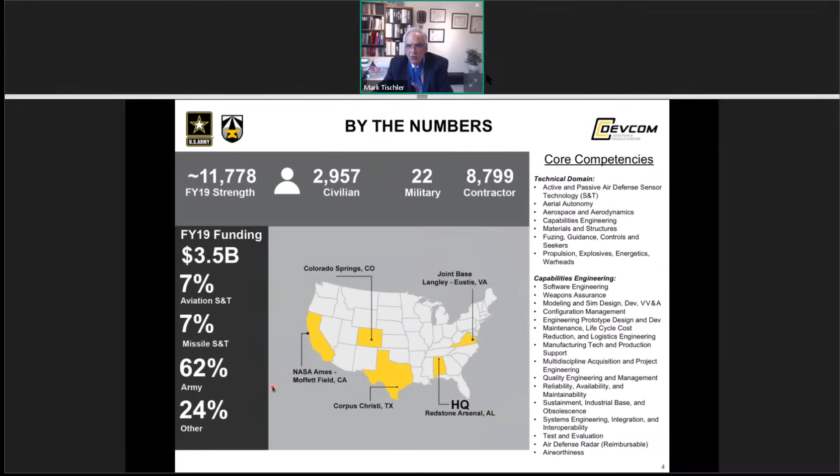The CCDC Aviation and Missile Center has a mission to deliver collaborative and innovative capabilities to the warfighter. We are headquartered in Huntsville, Alabama, and I'm located on the campus of NASA Ames Research Center. We have a total strength of about 12,000 employees. Our priorities are readiness, the future force, and soldiers and people, and you'll see that our research is closely tied to these priorities. It is traditional to start the lecture with addressing the personal connections to Professor Nikolsky.

And my personal connection is via Professor Pat Curtiss, who was a student of Professor Nikolsky's, and he gave the 20th Nikolsky lecture, as well as developing the Princeton Long Track. Professor Curtiss was a lifelong role model for me, a close mentor and research collaborator. He always stressed the importance of first principles, and as coined by my advisor at Stanford, Professor Art Bryson, a student of a student is a grand student, and that is my connection to Professor Nikolsky.

This is an agenda for my presentation this morning. I'm going to start out talking about flight control drivers and technologies. There are many flight control drivers. I've only listed what I think are probably the top four. First is that the vehicle is inherently very high order. You have the 6 degrees of freedom of the fuselage, but also the degrees of freedom of the rotor, the inflow, the engine, sling loads, and so forth.

This makes the system high order, and you need a high order linear model for flight control design and a high order nonlinear model for simulation. This requires engineers to have a strong multidisciplinary expertise. All hovering vehicles are unstable in hover and susceptible to turbulence, but this is especially true for multicopters. And finally, the bane of feedback control is time delays, and we're generating forces and moments via the rotor through about 100 milliseconds of time delay, which is dominated by the rotor flap,

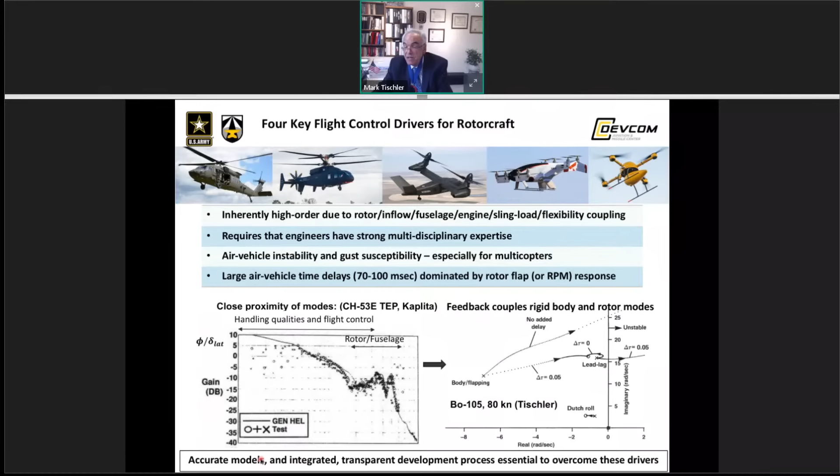And this kind of conundrum really limits flight control and dominates it, and was certainly the case for the Comanche, for example. So we need accurate, higher order, nonlinear and linear models integrated in a transparent development process to overcome these drivers. I'm going to focus on these four technical areas that have maintained a sustained focus in our team, and I'm going to hit the top advancements for the last 50 years. I'm going to list many folks,

but try to hit what I think are the top achievements. So the first is handling qualities development, and there's a great Nikolsky lecture by Professor Padfield in 2012 for reference. So the first major advancement was ADS-33 as a breakthrough for rotorcraft. It came on the heels of a fixed wing update of 8785, the fixed wing spec, which was moved into the frequency domain because of the high levels of augmentation and feedback. And that kind of characterization works much better in the frequency domain. And that was also done for ADS-33.

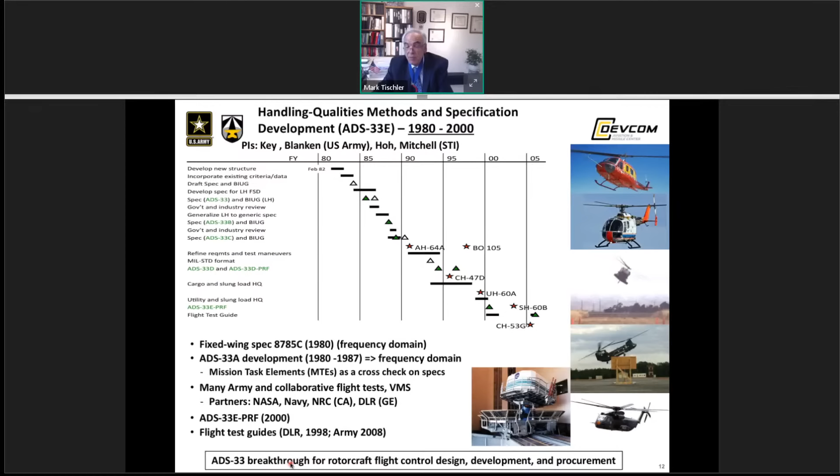Another key advancement in ADS-33 was incorporation of mission task elements, in which the pilot is asked to provide handling qualities ratings for specific maneuvers to cross-check the specs. We had many research partners internationally and nationally, and ADS-33 was released in 2000. There were flight test guides developed at the DLR as well as the Army, and ADS-33 has really been a breakthrough and provides guidance for flight control design, development, and procurement.

The first major breakthrough and concern was moving into the frequency domain, and there was concern about the applicability and practicality of this approach for rotorcraft. I had worked at Systems Technology, where frequency sweeps had been developed, and a lot of work on fixed wing. And I was the first to do frequency sweeps and system identification on a rotorcraft, that being the XV-15. This was followed by a major flight test campaign at the Army's flight test center to demonstrate these methods on the Bell 214ST.

And here you can see the rolling response to lateral stick on the Bell 214. And this is the magnitude, phase, and coherence. The first thing you notice is the coherence is very high, which indicates that the overall closed loop system, including the flight control, is highly linear. The frequency response is shown in the solid line, and you can see a very low order model can be used to characterize the aircraft closed loop response in the dashed line.

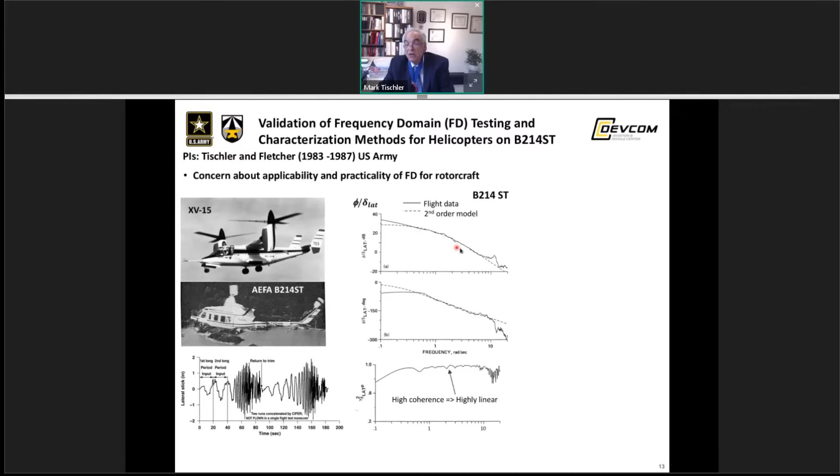And this linear response, as you can see in the time domain, tracks the data very well, even over fairly large amplitudes of about 20 degrees per second. And so the frequency domain was adopted, and you need only the frequency responses, and the points are pulled off for the metrics in ADS-33.

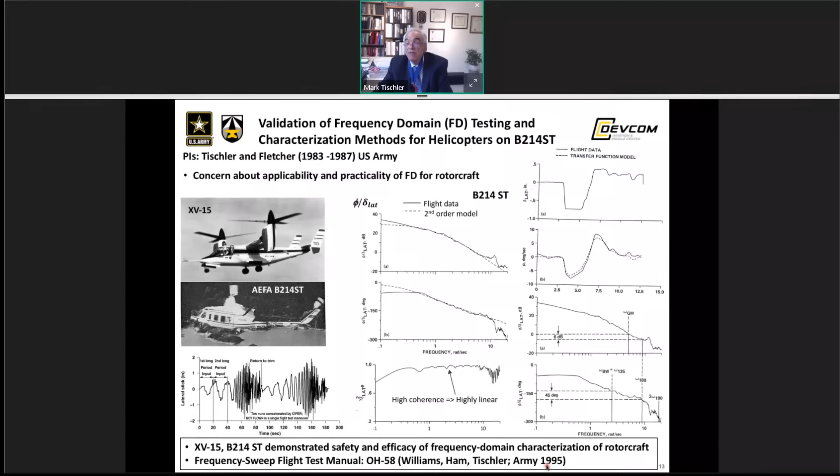So this work demonstrated the safety and efficacy of the frequency domain, and a flight test manual instructing how to instrument the aircraft and conduct the tests was published by the Army in 1995. The next important advancement that I want to talk about is understanding the importance of time delays to handling qualities. This was well understood in the fixed wing community, and you can see results here from John Hodgkinson, and for time delays exceeding 120 milliseconds, the handling qualities ratings quickly degrade.

The ADOCS, which was the first production representative fly-by-wire, fly-by-light rotorcraft, had measured time delays. We did frequency sweeps on this aircraft, and I did the system identification. The ADOCS has an identified time delay, as you can see here, of 240 milliseconds, which would predict very poor handling qualities for high gain tasks. And in fact, for the slope landing and run-on landings, the aircraft did enter into pilot-induced oscillations, or PIOs. And of course, these time delays have been improved over the years with improved technology.

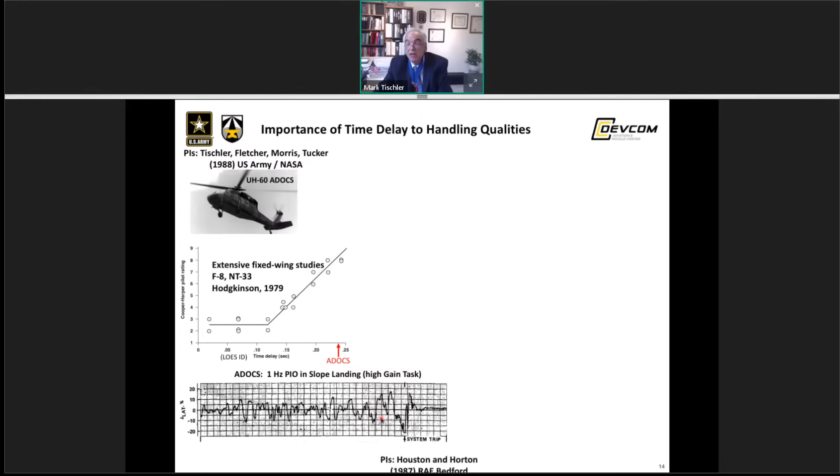So there was also work going on in the UK at RAE, and you can see that they came up with a time delay cap of 200 milliseconds, and work done in collaboration with the DLR, and they came up with a time delay of 120 milliseconds, which matches the flight test results for the fixed wing perfectly, and that's no surprise, really. So while in ADS-33B there were allowable large values of time delay, a cap was put on the time delay of 120 milliseconds. And so large effective time delays are a key risk to fly-by-wire systems, both for handling qualities and feedback control, and the key contributors are the rotors, filters, and actuator rate limiting is a major risk.

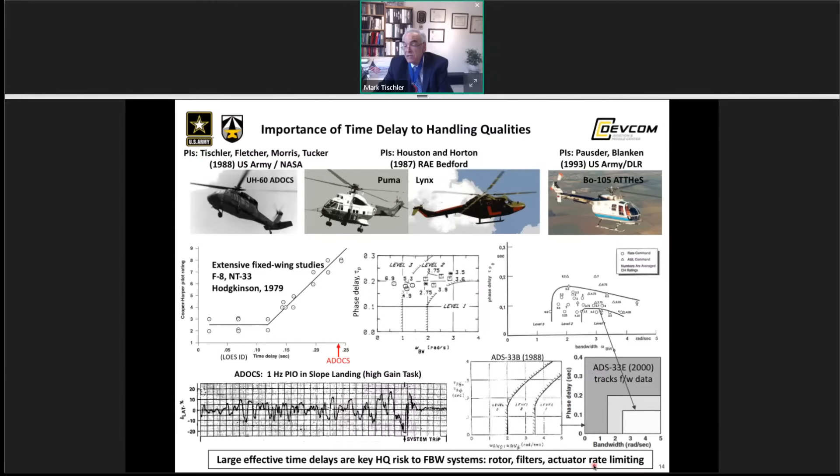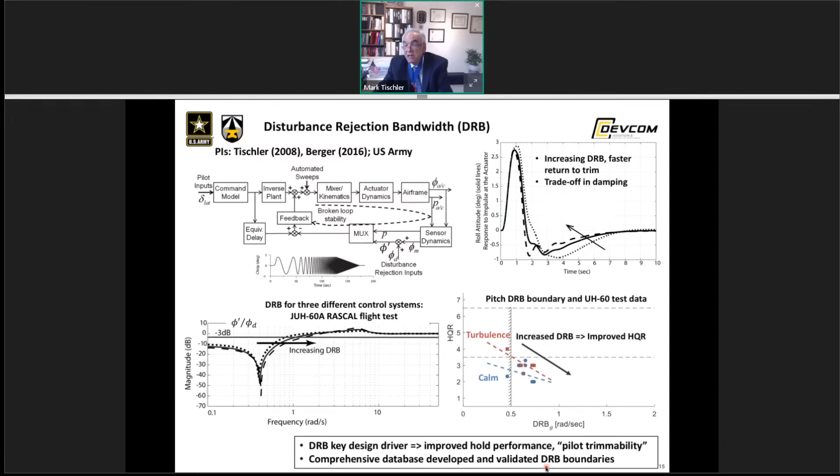ADS-33 has been used on many aircraft. This is not an exhaustive list, some programs in the US and internationally. And in fact, the first fly-by-wire helicopter designed to meet ADS-33 was the European NH-90. ADS-33 provides comprehensive design guidance to the flight control community, as well as flight control designers on many military and commercial rotorcraft programs. Even when these requirements are not explicitly required, they provide the guidance that the designers need.

The next area I want to focus on is physics-based simulation methods. I reference Pat Curtiss's terrific Nikolsky lecture of 2000.

The first models for flight control and simulation were tip path plane type models. And the pioneer in this area was Dr. Bob Chen at NASA with his development of the ARMCOP model. And this was a standard for many years for offline and piloted simulation. There are others, as I mentioned.

And the next development was in the 1980s with blade element models. And the pioneer in this area was at Sikorsky, Mr. Jim Howlett, who developed the Genhel model there for the UH-60 and for many other aircraft. The Genhel model has been a staple in the community as well as a standard for others. Initially, it was not real time, but as computational power improved, it became real time

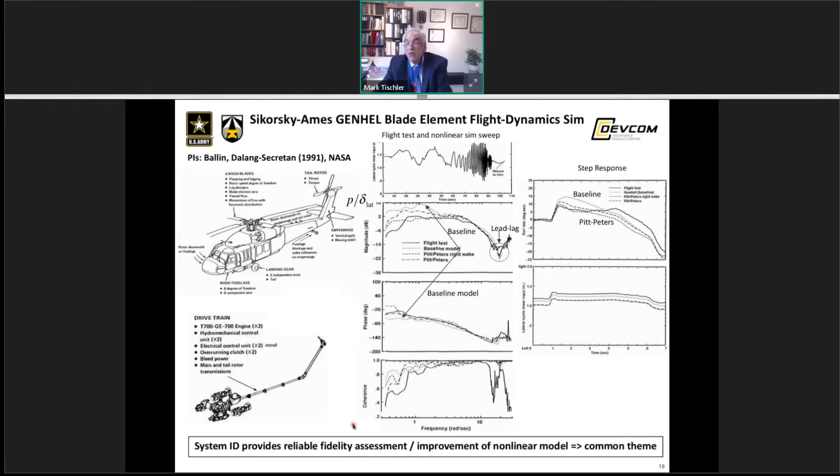So system identification, therefore, provides a reliable method both for assessment of fidelity as well as calibrating improvements of the nonlinear model. This is going to be a common theme throughout my lecture. Ray Prouty in 1994 in Rotor and Wing published an article entitled "The Case of the Cross-Coupling Mystery," and he noted that all the models in the 1980s had the wrong sign in terms of the off-axis response. That is, for example, pitch response to a lateral input and roll response to longitudinal input, and it wasn't clear where this was coming from.

A collaborative test between the Army and Sikorsky was conducted at full scale in the 40 by 80 wind tunnel of the Sikorsky Black Hawk main rotor. And this was the first time that frequency sweeps were done in a wind tunnel for the use of system identification. You can see the test data here is shown in the solid line. And again, we have extremely high coherence, indicating that the rotor response is a highly linear system in terms of its overall dynamics.

But the GenHel model has very large discrepancies relative to the off-axis response, and this is the pitch response to the lateral stick. And you can see large discrepancies in magnitude and phase. You can couple the system identification with the flight test data, with the wind tunnel data, and update the physics-based parameters, things like the flap and lag modes and effective Lock numbers and so forth, and drive the model to agree very well with test data.

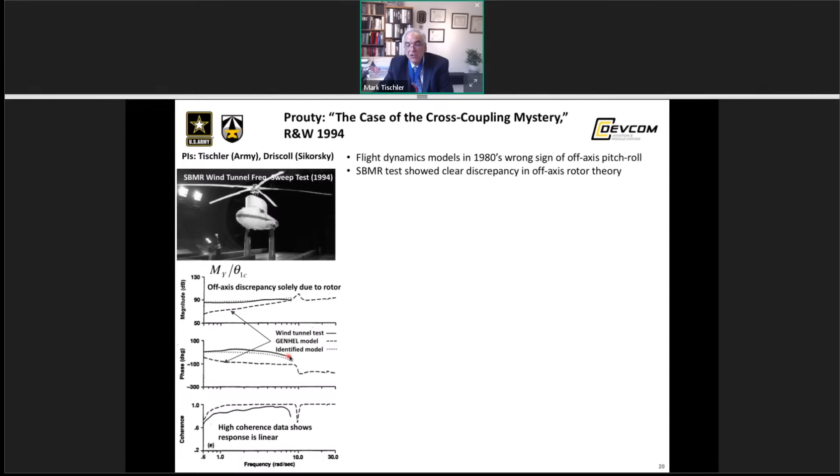But the source of the physical error in those parameters was not known. And so that's where Professor Rosen came along, with Technion, with his TEMURA model. It was a vortex wake model, and it demonstrated a distortion when the tip path plane entered into angular rates. And you can see that the vortices bunch up on one side and open up on the other. And this changes the cyclic inflow characteristics.

And if we look, for example, at flight test data for the UH-60, which was collected under our collaboration with Israel, you see the roll moment due to pitch rate. I conducted system identification here, and you can see that GenHel has the right magnitude and the opposite sign, whereas TEMURA is very close to the flight test value with the correct sign.

This was not a closed form model, and so for that, two corrections were proposed. I proposed the aerodynamic phase lag correction, which you can see corrects the off-axis response. And there's a 180 degrees phase shift, which was indicating the wrong sign, as you can see, for GenHel. And then once that's updated, then it tracks very carefully.

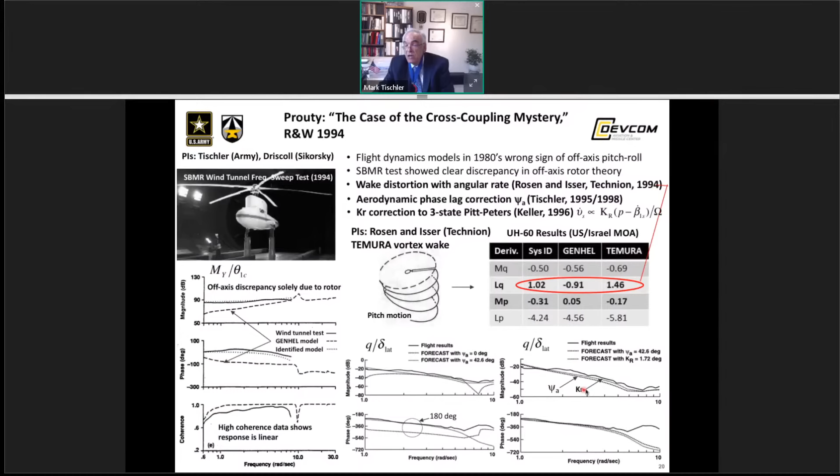And then Jeff Keller, a student of Professor Curtiss, and now at CDI, he developed the KR correction, which is widely used, and that's added on to the conventional Pitt-Peters model with the so-called KR correction and the angular rate of the tip path plane in inertial space. And you can see that these two methods of correction essentially track each other and the flight test data very closely.

The last area in physics-based modeling I want to talk about is stitched models from point model data and trim data. So this comes under the overall category of quasi-linear parameter varying models. It gives you a real-time model either from the higher order linear physics-based output or directly from system identification point models. And for rotorcraft, you only need about really 4 point models at low to mid altitude, and then much finer trim data. And these two quantities are stored in lookup tables as a function of forward airspeed.

And then we have nonlinear gravity forces and nonlinear equations of motion. This gives a very accurate simulation of the dynamics and control of the aircraft. And what's really good about this type of model is that you only need to collect data for one mass configuration, and then it precisely extrapolates for mass properties as well as altitude and airspeed. And this was instantiated in a tool called STITCH and released by the Army in 2018.

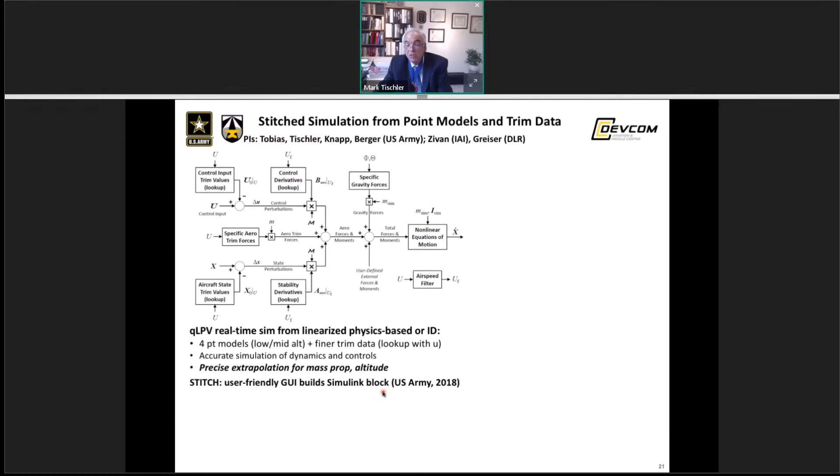This is an example of the agreement for a known physics-based model, in this case GenHel, versus a STITCH model based on the higher order linear model output with a tool called FORECAST. And you can see that the aircraft states track the GenHel model perfectly. The overlay, you can't even see the difference between the curves. And again, in terms of the control variables, essentially perfectly. There's a very small bias here, but the dynamics are tracked extremely well.

This approach was flight validated both in fixed wing and in rotary wing, as well as in advanced rotorcraft simulation, PSU. It's also the basis for developing level D training simulators, especially in Canada, in our NRC and CAE. And the approach is really ideal for simulation of UAVs, where physics-based model assumptions don't track the many UAV configurations all that well at the current time. It's also a very quick approach.

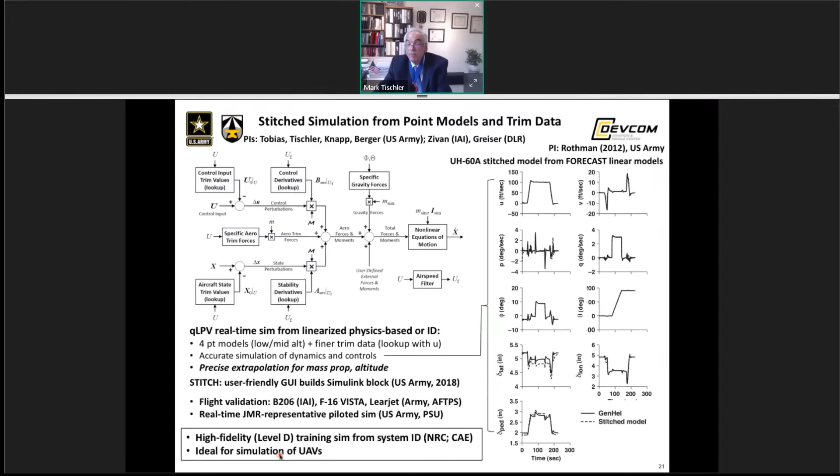Finally, I'd like to highlight ongoing work under the NATO AVT-296 entitled Rotorcraft Flight Simulation Model Fidelity Improvement and Assessment. There are a wide number of countries involved in this effort that I lead, as well as a very large database from legacy aircraft to advanced configurations and UAVs. We're developing methods for fidelity assessment as well as improvement methods, which range from simple to complex. There's a dedicated session next week in the VFS forum, as well as a final report that will be issued this year and a lecture series at the beginning of next year.

The third area I want to focus on is development of system identification, and a reference here is my textbook with the AIAA in 2012. The early work in system identification is really to be credited to the fixed wing community, and the pioneers in this area were Iliff and Maine from NASA and their development of maximum likelihood in the time domain.

Rotorcraft came along very quickly, and the pioneer in this area is credited to Molusis at Sikorsky, and he adapted the fixed wing MMLE methods to rotorcraft. And one of his key breakthroughs was stressing the importance of the model structure. And in this case, he focused on the rotor body coupling and the need to include a system identification model structure which includes rotor body coupling. And I showed you that at the beginning of my lecture, and this all comes out of the work from Molusis.

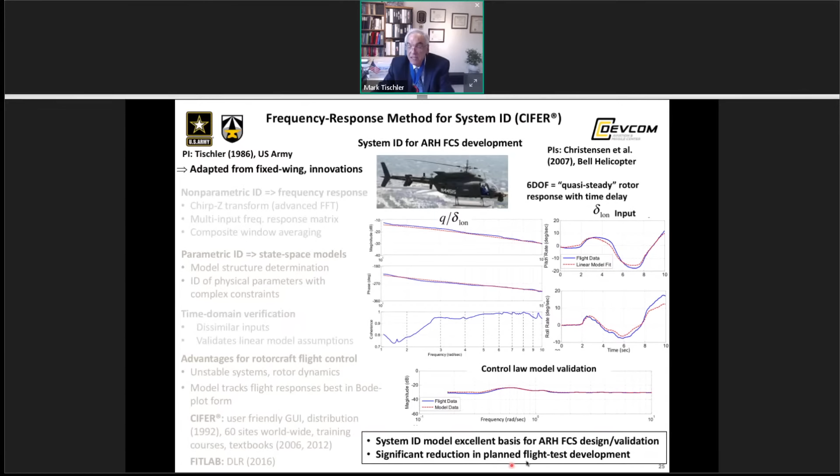And finally, system identification was used to validate the control law implementation in the real-time flight control processors. So this was a 6 degree of freedom model, which basically has the assumption of a quasi-steady response, and the rotor is modeled with a simple time delay. And this works quite well, provided an excellent basis for ARH flight control design and validation, and was a significant contributor to the reduction in overall planned flight test development time for this aircraft.

As we've seen earlier, we need higher order models for modern aircraft. If we use a 6 degree of freedom model for the BO-105, as I showed earlier, it does not track the data at all. It misses the coupled flap and fuselage dynamics, as you can see here, as well as lead lag dynamics. And so we needed to develop a higher order model, and I developed a hybrid rotor airframe model, which includes the first regressive rotor modes, as well as the engine modes. You can see that that tracks the flight test data extremely well.

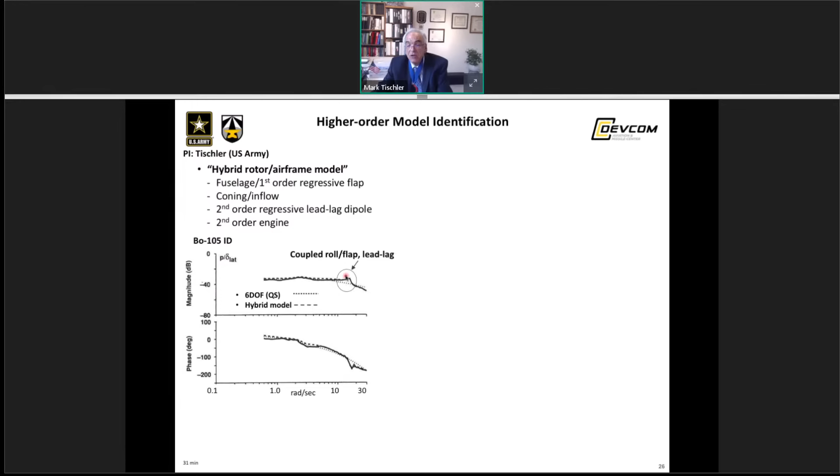And a similar approach was used to extend fixed wing system identification model structures, and we conducted a collaborative flight test with Boeing. I developed a hybrid flexible model, and flight tests were conducted by the Army in cooperation with Boeing, and you can see here that you have the low frequency flight dynamics modes, but you are also well capturing the anti-symmetric wing bending modes.

This was also extended in work in collaboration with Cessna Aircraft, Steve Haggard and his team, and this took a wind tunnel-based quasi-steady model, or so-called static elastic model, and then extended it with Nastran models for the first two bending modes. And you can see that the overall model tracks very well, and this is important for sensor placement in flexible aircraft. So the key applications here are flight control design for modern rotorcraft, and especially for UAVs, which have all these higher order characteristics.

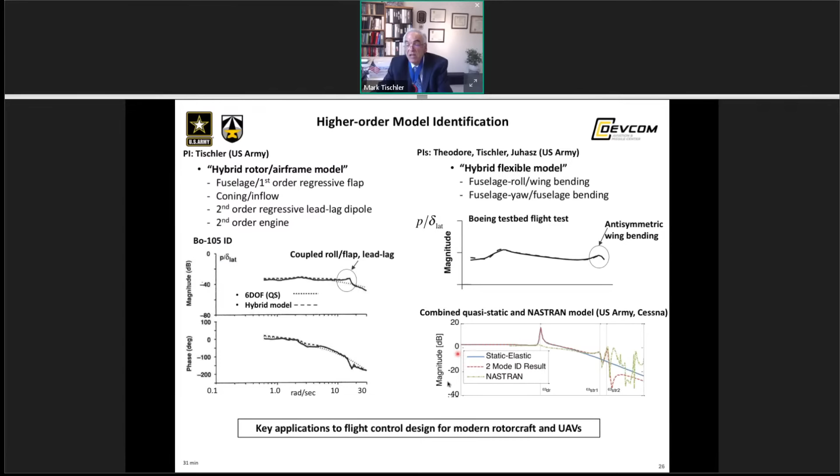I now want to move on to the fourth area, which is flight control systems. And here our reference is a textbook developed that I led with our team at Ames Research Center and published by AIAA in 2017. Again, the pioneering work was done in the fixed wing community, and this is a common theme you're hearing over and over again.

And the first production digital fly-by-wire system, a groundbreaking effort, was developed by McDonnell Douglas and fielded in 1978. Boeing came along and adapted these techniques to their heavy lift helicopter program and demonstrated them in flight testing of the Model 347 in 1975. And so this was really the first demonstration of digital fly-by-wire for rotorcraft, and it was very much ahead of its time. And it included advanced augmentation modes, feedback of the sling load motion to the control system to improve the damping of the sling load mode. And it had no mechanical backup, which is amazing for this time period.

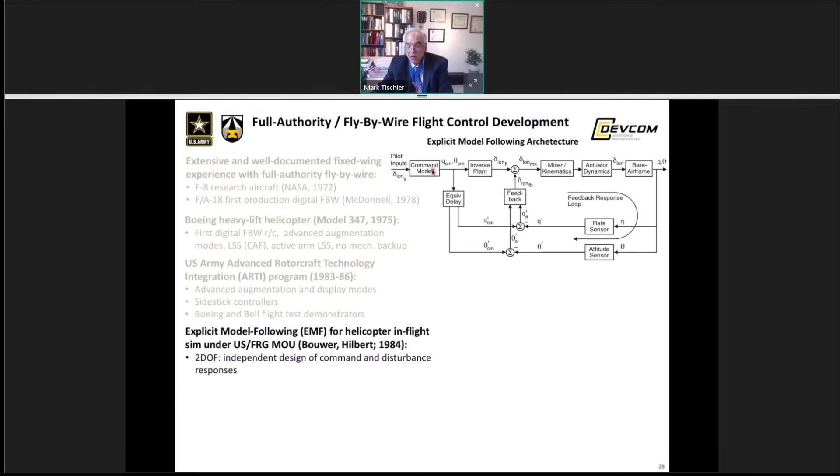The Army extended this fly-by-wire work with the ARTI program in the 1980s. It included side stick controllers and advanced augmentation and flight test demonstration. The explicit model following approach was based on the pioneering work for helicopters in the collaboration between the U.S. and DLR in Germany. It is essentially a 2 degree of freedom architecture. This shows an example of this architecture where you have a feedback loop which provides you stability and disturbance rejection. And that can be designed independently of the command model, which gives you piloted handling qualities in conjunction with ADS-33.

Now, the ADOCS, which I mentioned earlier, was the first fly-by-wire or fly-by-light production representative demonstrator, developed in the 1980s by Boeing. And it validated that explicit model following was really a key enabler of ADS-33 response types, and really enabled the simplified and transparent design and development of the flight control system, which also included things like a side stick controller with unique trim and pilot selectable outer loop modes. Since that time, explicit model following architectures have been widely adopted on modern fly-by-wire rotorcraft.

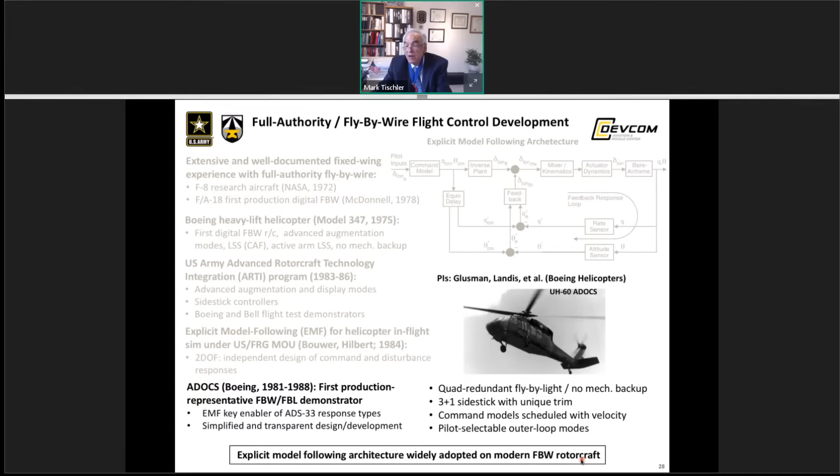The next area I want to focus on is the development of the design method using multi-objective parameter optimization. This is a specification-driven design, again, developed in the fixed wing community. And the key feature of this approach is that the user just selects the architecture, and that can be PID, explicit model following, or LQR and H infinity. And then you specify the design parameters like gains and weighting filters, for example. You specify which specifications you want to include from ADS-33, or 9490 for fixed wing. And the optimization then drives the design parameters to meet all the specifications. And you can generate what's called a Pareto front of optimized designs, which is a family of solutions which looks at the trade-off between improved performance versus improved control usage.

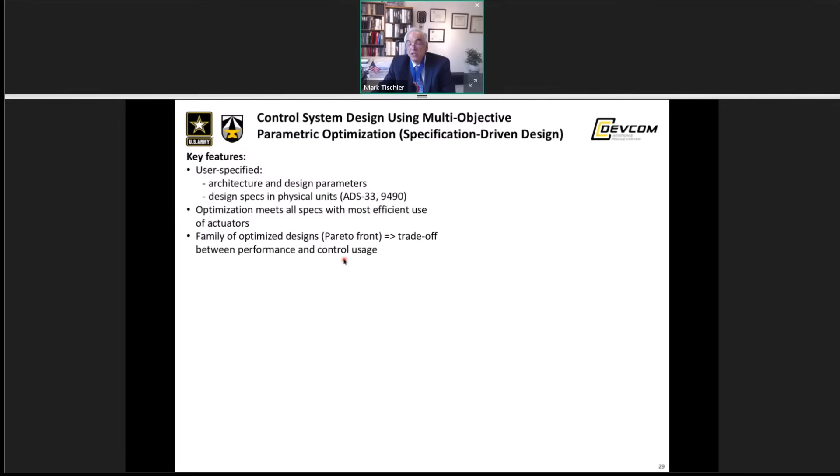And this approach was developed in Germany by the DLR and used in development of the Eurofighter. It was adopted in the United States and advanced in pioneering work at UC Berkeley, the University of Maryland, and in collaboration with Cal Poly San Luis Obispo. And all this work was done in collaboration with and led by the U.S. Army, and instantiated in the CONDUIT package. This is a one-stop shop for flight control design, setup, optimization, and analysis.

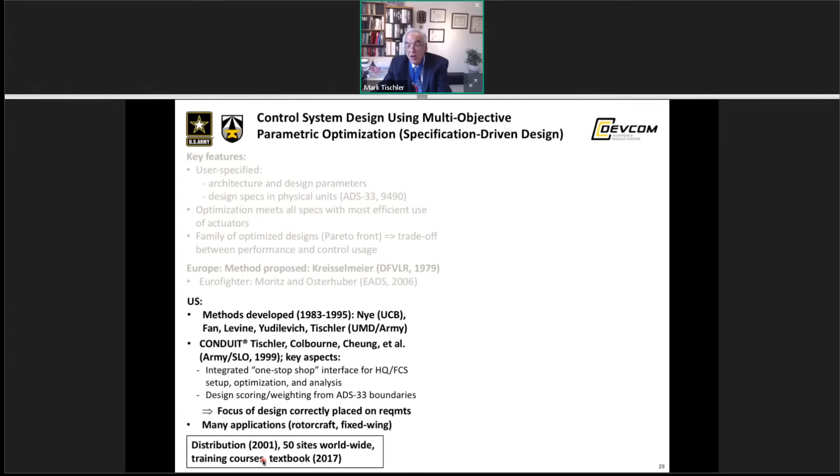For example, it has libraries of all the specifications. You can just point and click and bring in any of the specifications you want. It has all the code necessary to run those specifications. And more importantly, by using ADS-33 boundaries, this takes care of the design scoring and weighting automatically. So the user doesn't have to worry about this. And the focus, therefore, is directly and correctly placed on selecting the requirements. So it's a requirements-driven approach with many applications to rotorcraft and fixed wing. It was distributed in 2001. There are about 50 sites worldwide. We've taught many training courses and mentioned our textbook in 2017.

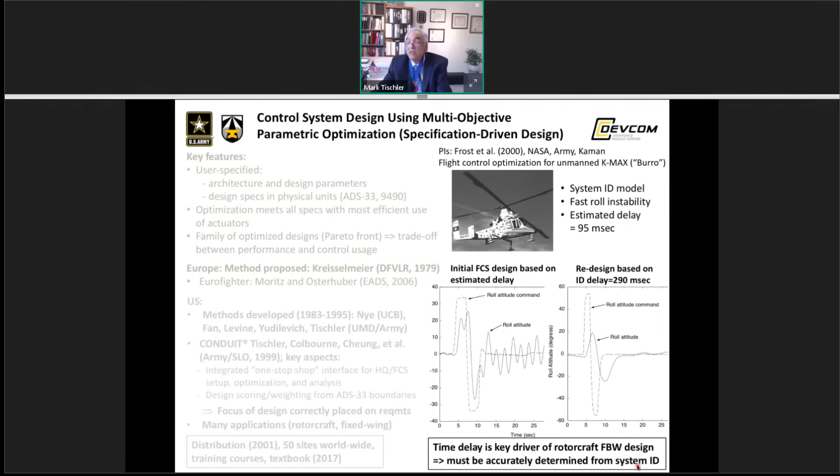So again, we see time delay is a key driver in fly-by-wire design, and it must be accurately determined and can only be accurately determined by system identification in the frequency domain. All the work so far has focused on full authority flight control systems. Legacy aircraft have partial authority, typically plus or minus 10%. And pioneering work was done by Dr. Sahasrabudhe at Sikorsky in collaboration with the U.S. Army on the MCLAWS program. And this was developed to achieve ADS-33 requirements with partial authority to allow flight in the degraded visual environment.

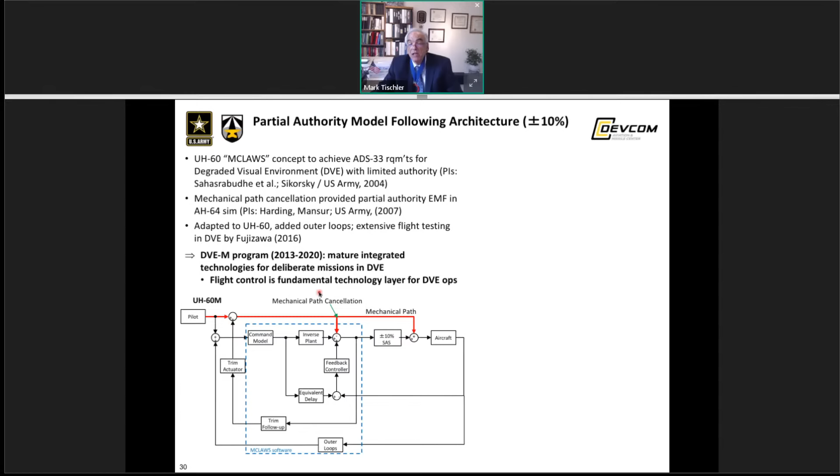This work was advanced by incorporating a mechanical cancellation path, as you can see here, and that basically takes the mechanical path totally out of the system, as long as you stay within the 10% authority of the control system. And then that's replaced by an explicit model following system, as you can see here. And then Brian Fujizawa introduced outer loops in 2016. And this overall system was matured and integrated into the DVE mitigation program, along with advanced sensors and cueing, and allowed for deliberate missions in the DVE for legacy aircraft. Flight control is widely understood to be a fundamental technology layer for DVE operations.

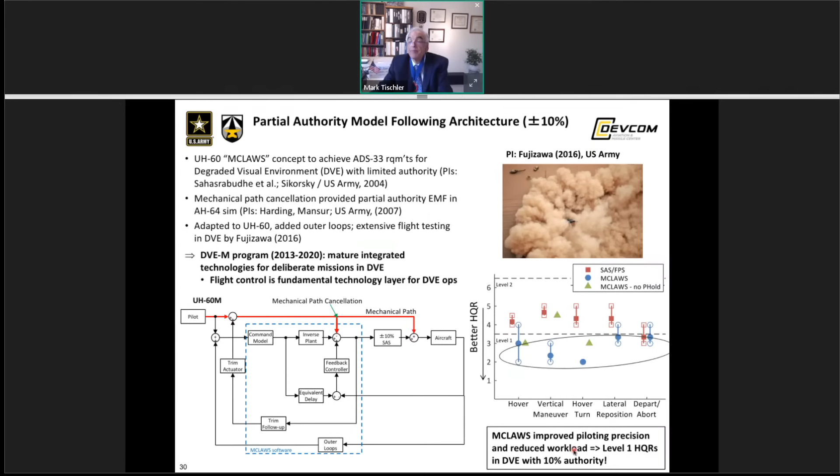And these are some of Brian's test results conducted in a full-on brownout situation, in which the pilot has almost no visibility, in 2016 at the Yuma Proving Ground. And you can see that the pilot handling qualities are level 2 in this case for just the SAS and FPS. This improves to borderline level 1, level 2 with just the inner loop. And then when you include outer loops such as position hold, you get a solid level 1 behavior with handling qualities ratings of HQR 2s, which is really amazing in this condition. So the MCLAWS system provided improved piloting precision, greatly reduced workload, level 1 handling qualities in DVE, all with a 10% authority system.

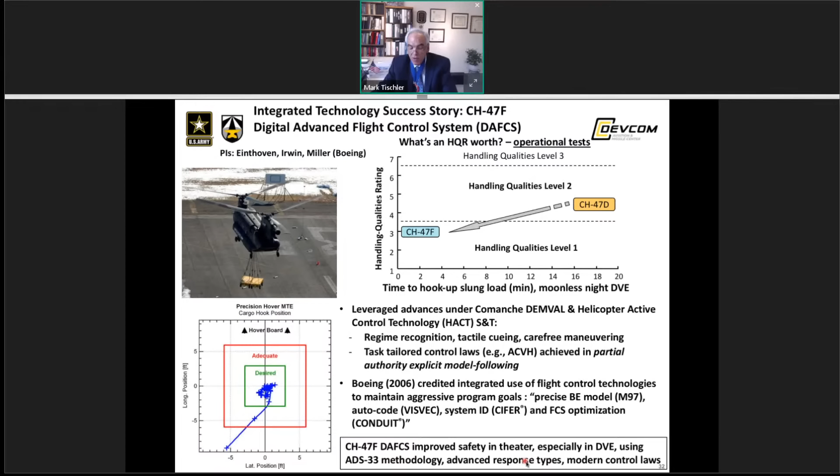And the CH-47F DAFCS leveraged a lot of work done on the Comanche as well as the RASCAL program with things like tactile cueing and carefree maneuvering, as well as advanced task-tailored control laws. Boeing credited the use of the integrated technologies that we've talked about to meeting and maintaining the aggressive program goals. And the 47F DAFCS was fielded to theater with great improvements in safety. And this was credited by Boeing, especially in the DVE, to the use of ADS-33 methodologies and associated response types and control laws.

The second success story I want to point out is the CH-53K program developed at Sikorsky. This modeling work was led by Dr. Sahasrabudhe, and this was based on CH-53 system identification.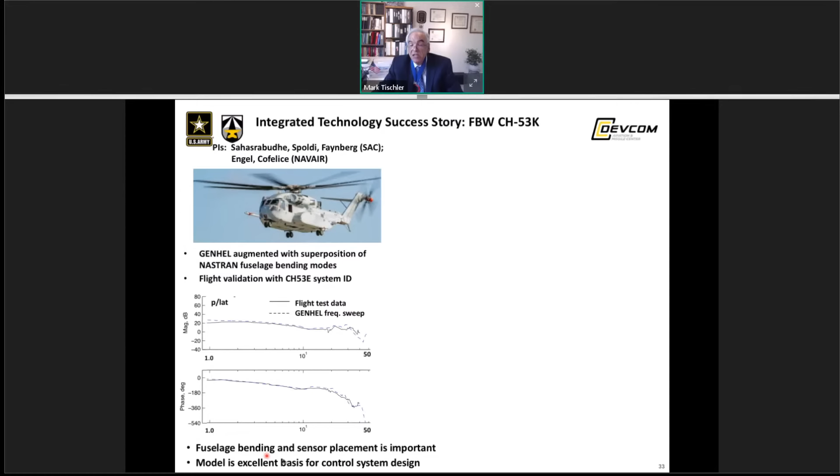And you can see the flight test data here at low frequency has the quasi-steady flight dynamics, but at higher frequency has the rotor modes and especially the flexible body modes, which were very important. And you can see that GENHEL augmented with Nastran, in a method very similar to what I demonstrated earlier, tracks the flight test data extremely closely and provided a basis for sensor placement, which is extremely important, and an excellent basis for flight control design.

So the full authority CH-53K program had explicit model following with advanced modes, and especially advanced outer loop modes like deceleration to hover and position hold override. They used GENHEL as shown here, as well as CONDUIT for the initial design efforts. It had an active stick and made a very strong use of the in-flight simulation capabilities of the Army and

NRC for risk reduction. And preliminary flight test data indicates level 1 handling qualities, both for the nominal aircraft with the sling load and in the degraded visibility environment, UCE2. And they credited these advanced outer loop modes, really automated modes of deceleration to hover and position hold override, with providing for significant workload reduction in the DVE.

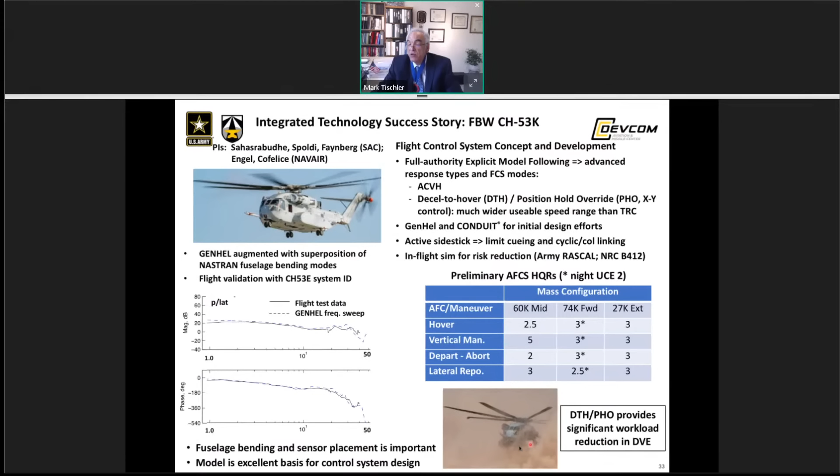I now want to switch gears, take a breath, and move on to talk about how all these technologies are going to be applied to advanced configurations. And the first category that I want to talk about is the FLRAA and FARA configuration, some of them shown here.

This is flight test data from the V280, and flight test data is shown here in the blue line, magnitude, phase, and coherence. Again, you see very high coherence, indicating very high precision and linearity of the input to output system. This is the bare airframe response, and sweeps were done on the aircraft and also in the nonlinear simulation in the system integration lab.

And you see very good agreement both in magnitude and phase, and you can extract what's called the mismatch curve. Essentially it is an error curve between these two sets of data, and you get this red line here, and that's within the proposed boundaries that were developed originally for fixed wing and adopted by the NATO working group. These are the so-called MUAD, or maximum unnoticeable added dynamics boundaries, and again, the V280 is well within those boundaries.

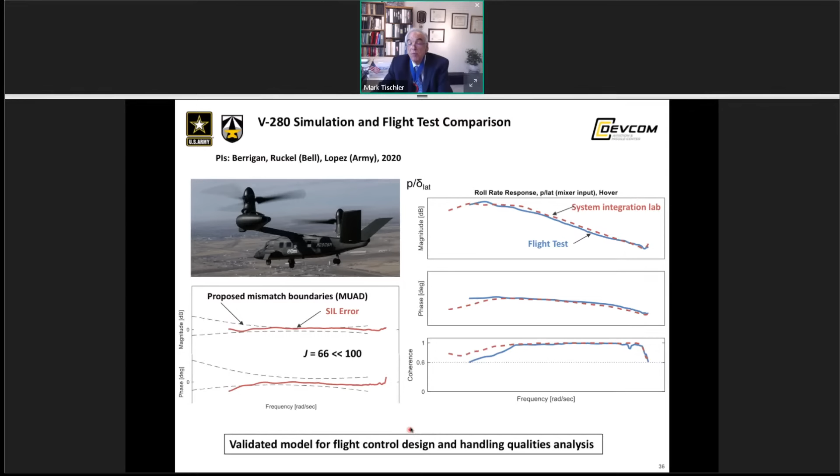There's also an integrated cost function based on system identification, and an integrated cost function of less than 100 is considered a good model. Less than 50 is considered a perfect model, and you can see that we're solidly in the good region. And so we have a validated model for flight control design and handling qualities analysis in V280, and there's a paper on this next week by the authors.

Another significant advancement in this category was a collaboration with Sikorsky on the X2, and frequency sweeps were conducted by Sikorsky, and system identification results here are shown in the blue line. Again, very, very high coherence. We didn't know if this was going to be the case. It's a completely new aircraft, and yet again, very strong linearity of the input to output process here. In this case, it's roll rate response to lateral stick.

And we see here physics-based models, the GENHEL model from Sikorsky, and the HeliUM model from the University of Maryland, and they agree with each other quite well, but you can see a considerable discrepancy, especially in the prediction of the lead lag modes. You can couple the identification with the flight test data and update the physics-based modeling, and this was work done by Dr. Juhasz, and so the physics-based model parameters, things like the first bending mode and first lead lag mode, can be updated, and then the model very closely tracks the flight test data.

So this is an approach to updating physics-based modeling. The overall result shows very good improvement in the correlation in both rotor dynamics as well as mid-frequency response, and you'll see more work on this again next week.

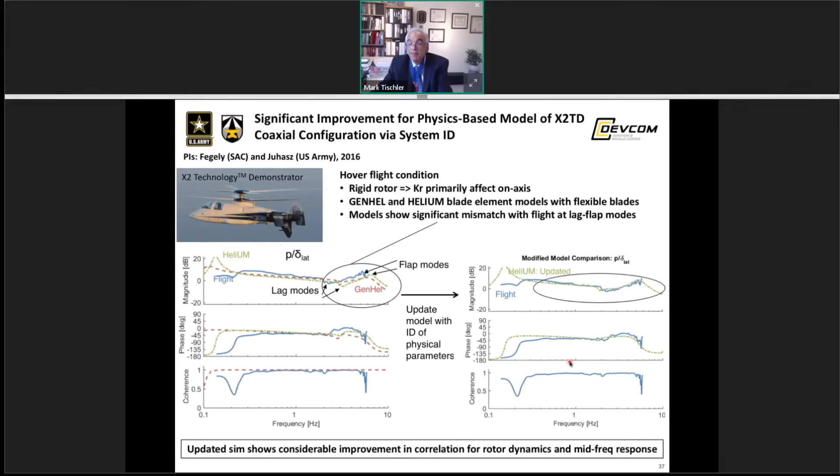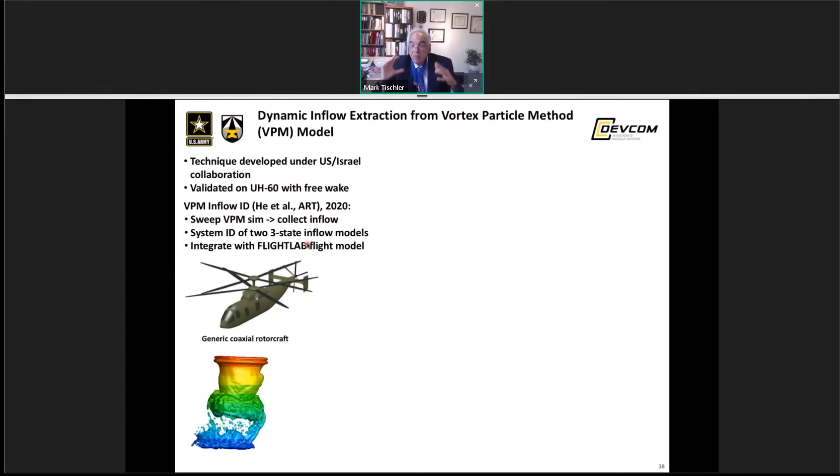Additional work was done in the incorporation of higher order aerodynamics, and this was pioneered under the U.S.-Israel collaboration, using free wakes and validated using the UH-60 flight test data, and then it was adopted by ART and CDI and advanced. And at ART they incorporated the vortex particle method, and you could see the motion in the video of the wake response here, and then you collect the data, do system identification, and collect two essentially Peters inflow type models, but the parameters are updated, and then you get two linear models now that can be directly integrated into the FlightLab flight dynamics model.

And to see how well this agrees with the nonlinear data from the VPM method, we overlay here the time response for the rotor's self-induced inflow, as well as the interference inflow from the top to the bottom rotor, which is very large and almost as large as the self-induced inflow, as you can see. And this provides a real-time model, whereas the vortex particle method to generate this 90-second sweep takes about an hour.

So it's not a real-time model, and it doesn't provide a higher order linearized capability as we can once we do the system identification. Then you can incorporate these models into Flight Lab, and you see extremely good agreement with the nonlinear behavior of the model, with a cost function of 24, which essentially is a perfect model. If we look at the original model based on Peters with no mutual interference, the cost function degrades by an order of magnitude.

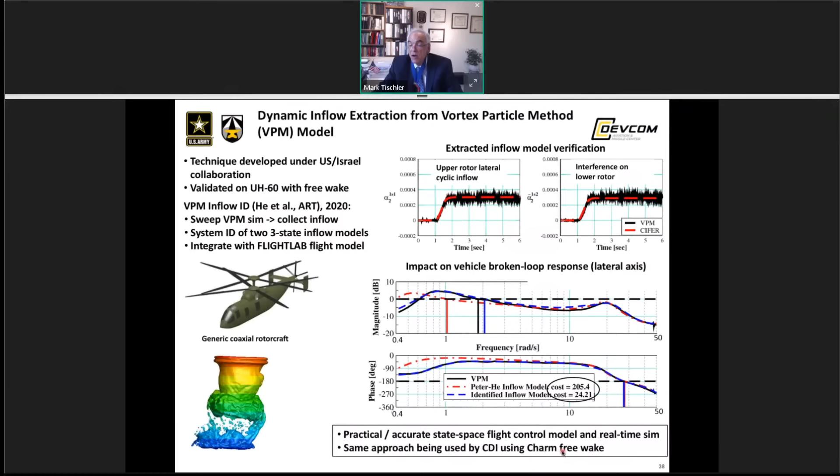So this is a practical approach for state space identification of the inflow characteristics and development of a higher order state space model for flight control and real-time simulation. And the same approach has been used by CDI with their CHARM free-wake model, and papers on both of these will be shown next week at the forum.

The last area I want to highlight is development of advanced high-speed handling qualities and control laws. And this is work using generic high-speed configurations in collaboration with Penn State. And we had worked in collaboration with Cessna on their fixed-wing work in fly-by-wire. And in that work was demonstrated the advantages of advanced response types like Nz command, vertical acceleration command, and P-beta control for lateral directional, neither of which are contained in ADS-33. But at high speed, they provide very good characteristics for the rotorcraft.

And the reason is that at high speed, rotorcraft really fly like a wing. So the rotor becomes essentially an aspect ratio 1, and it becomes a circular wing. And therefore, at high speed, it's no surprise that we would find that the fixed wing response types and fixed wing specs would be appropriate.

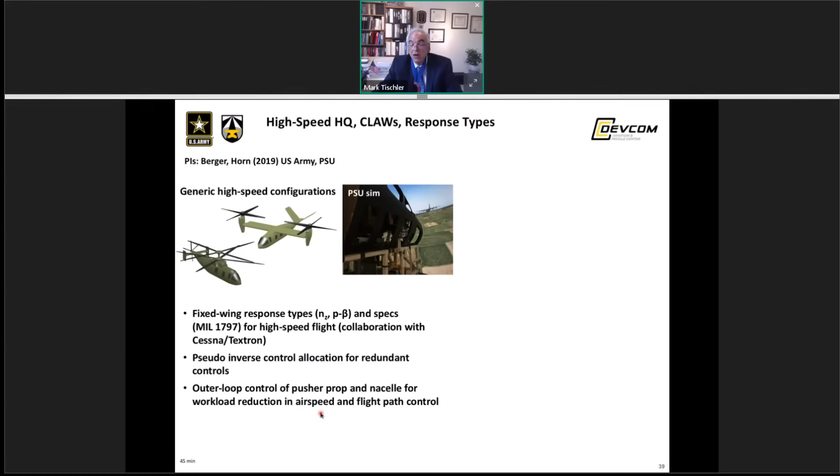Also developed here by Dr. Berger was advanced control allocation based on JSF work, as well as outer loop control for airspeed and flight path, which reduced workload. And you can see here the design process, which meets the 1797 requirements for fixed wing at high speed for these generic configurations.

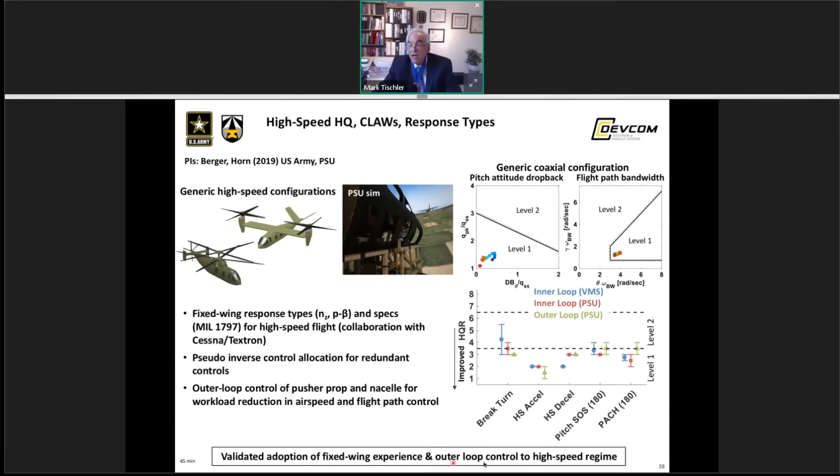And in tests in the PSU fixed-base simulator, borderline level 1 was extracted, and this improved to an HQR 2 for some of the maneuvers when the outer loop mode was included, and it was found that this needed to be pilot selectable. So this validated the approaches developed with fixed wing experience, as well as the outer loop control for high speed regime flight.

Additional progress in FVL and FARA configurations includes rotor state feedback, which improves position hold in winds, and development of high-speed MTEs under the NRTC program. Chris Blanken at the U.S. Army published ADS-33 guidelines in an important publication in 2019, which essentially brings ADS-33 up to date for legacy aircraft.

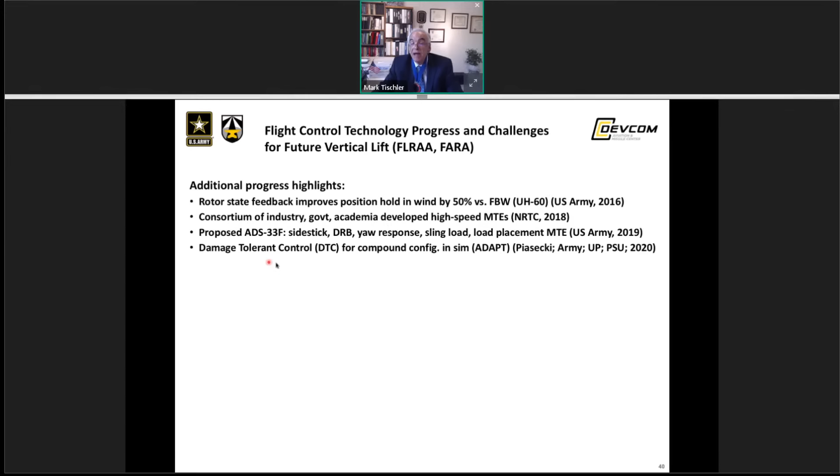And finally, there's been a long-term collaboration with Piasecki under the ADAPT program, in which reliable damage tolerant control was developed for vehicles like compound aircraft, which have redundant actuators. But there still remain some key upcoming challenges, even with this progress.

One is the development and publication of an ADS-33G for advanced configurations and associated MTEs. This is a challenge because of the proprietary nature of these programs and the need to publish the flight test results. And secondly, we need test facilities which are suited to parametric handling quality studies for these advanced high-speed configurations, and they do not yet exist except in ground-based simulation.

The second upcoming challenge is a highly compressed development schedule that's anticipated for these programs, going right to a prototype, and the associated need to minimize flight test tuning. And in my view, overall, we are really at the 90% point. We have a very mature flight control technology for conventional single main rotor and tandem configurations. But we're really only at the starting gate for FVL type configurations.

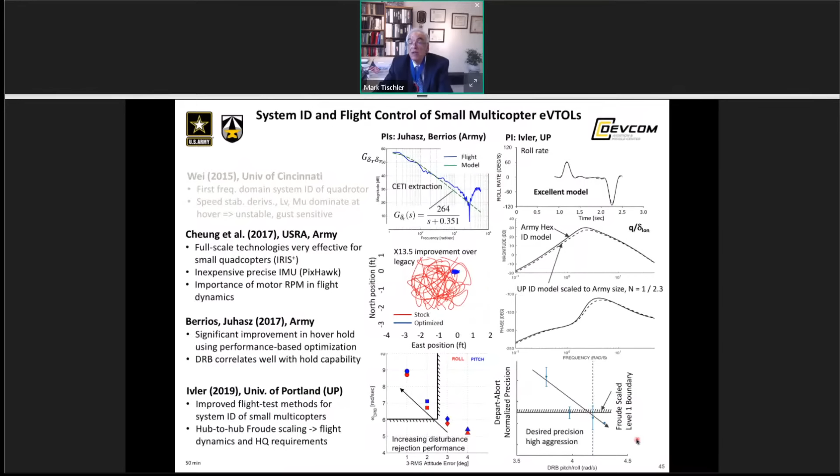And so the overall idea is that you have deterministic reconfiguration. You can take your payload, put it on a scale, measure its characteristics. Instantaneously, the stitch model updates to the off-nominal configurations. You get a new F and G matrix. And then you can use nonlinear dynamic inversion to update the control laws instantaneously, and you have automatic but deterministic reconfiguration for package delivery.

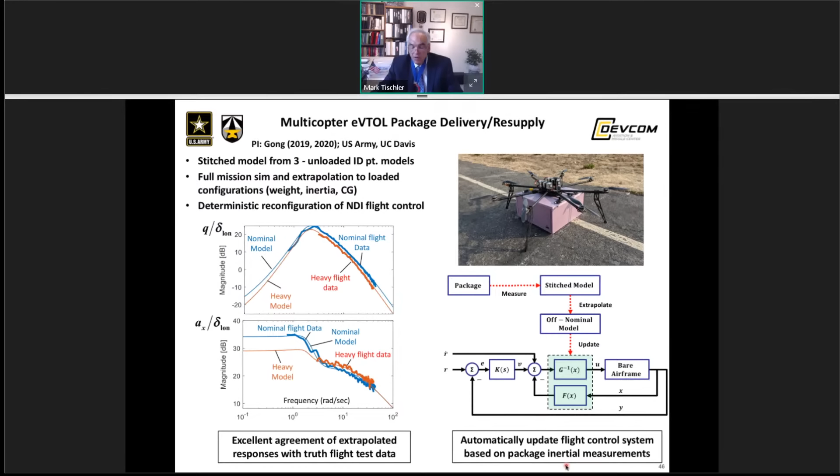Additional progress highlights that I want to mention are system identification work for multicopters, and this is led by Dr. Mark Lopez, and this demonstrated a significant loss of control power as the rotors start to come into interference with each other. And this has strong implications even in full scale. When you start to add a whole lot of rotors, they begin to interfere with each other, and control power is significantly reduced.

Dave Klyde, Systems Technology, has led a significant multi-year effort to develop UAS handling qualities criteria, as well as mission task elements and a software toolbox. The Army has a program called JTARV, which is the Army's Joint Tactical Aerial Resupply Vehicle program. It includes both physics-based modeling as well as system identification and flight control performance.

But yet again, with all these advances, there remain challenges. The multicopters, as I mentioned, are all dominated by these stability derivatives, which makes them extremely sensitive to turbulence. And this has been demonstrated over and over again for these kinds of vehicles. Flight-validated physics-based model simulation is really in the early stages, and it's not ready and does not track the flight test data based on theoretical values of the inputs.

And also these configurations, they change rapidly. You fly them, you crash, you change the configuration the next day, you go out and fly again, and immediately you have to update your model using system identification in this case, and you have to update your flight control feedback properties. And finally, there's a challenge to develop a full set of ADS-33 specs and associated MTEs.